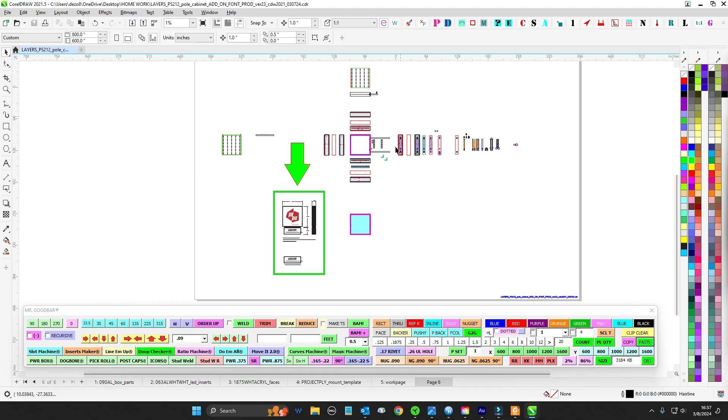Alright, got another one here. So this is for the PS212, whatever you want to call it.

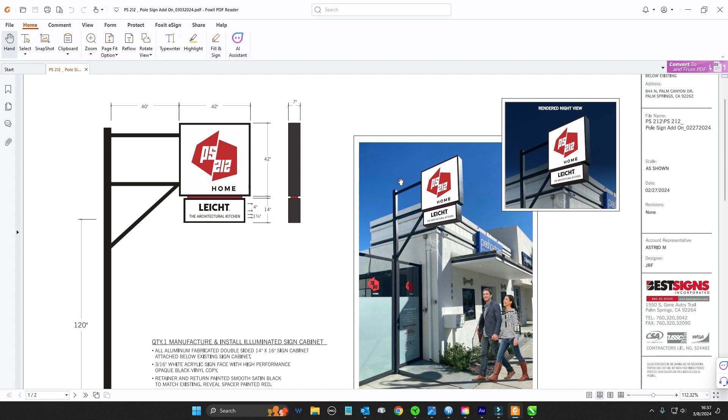In 2017, 2018 we went ahead and built this whole thing. And so now what they want to do is add this little box down here, give it a little buddy to hang out with, literally.

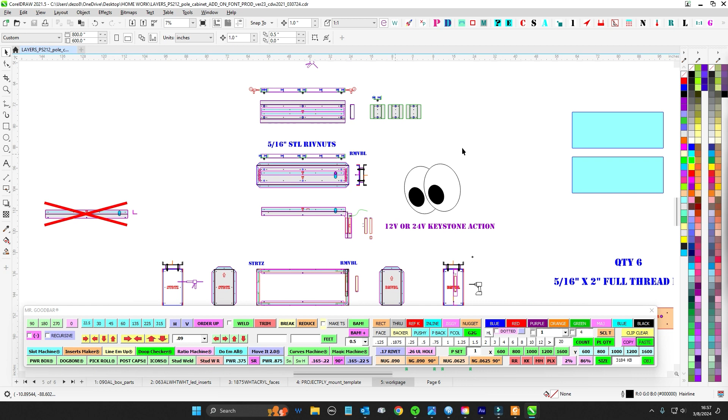So got some dirty dangles going. This is going to be one of those soft, chewy center with a hard candy shell type slider face, guys. So pretty straightforward for you cats. I just want to point out a few little things and kind of where my mind was and what order to do things, but otherwise I'm thinking slam dunk for you cats.

Also, it is noted on the work order that they do want this installed by the date. So this is kind of like as usual, everything's always due right now. But this does have a hard install.

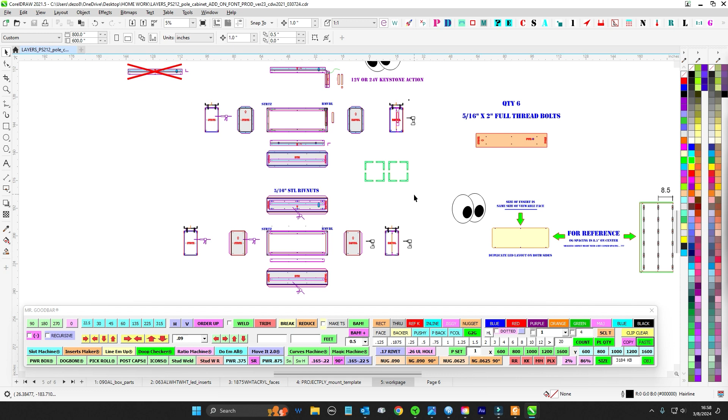So let's just get this through, because the center stage is on deck and I'm going to have to go full afterburner on that. So I figure we'll just push this through, get it out of the way, and then we can concentrate on that stuff. So with that being said, let's get after it.

So a little bit of the lay of the land. Here's all the 090 parts: hard candy shell, soft gooey center, and then the little top reveal part. You got some jigs to hold it together.

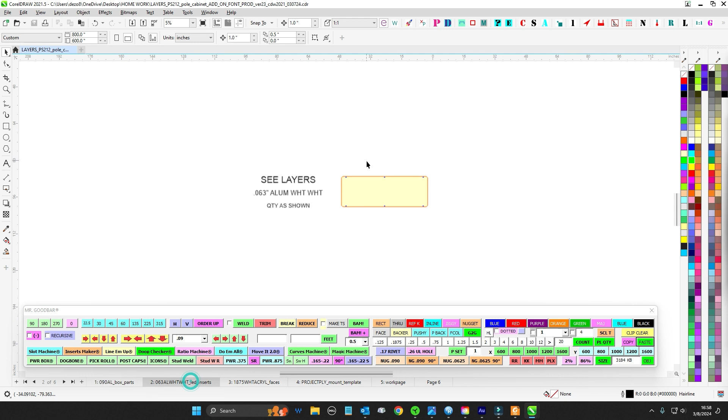You'll have a single 063 white, real simple. And then the two faces, get those two first shot. And then I got here for install, it's going to be either Project Ply, the Lauan, or like a 1/8 inch Sintra, or any kind of thing that's kind of a little bit stiff.

Or any kind of thing that's kind of a little bit stiff, and they'll just hold that up and drill their holes.

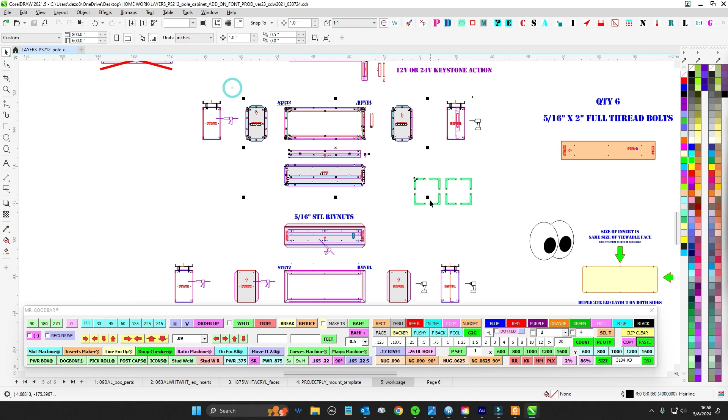So again, you start from the center out like we do, make your chewy center. We do have a bottom here that will clearance the UL holes, and it goes on one side there. And then you have your top, which has this little tray here, and that's going to be for electrical. I'll get on that in a second.

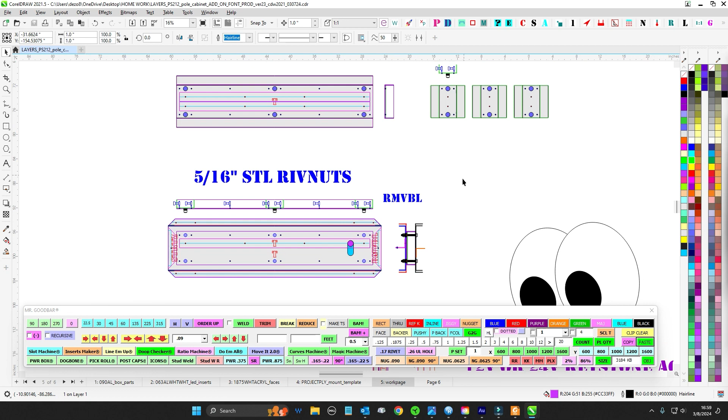And then you'll see where it goes on one side here. And then that has a little clearance for the power to come through from the top, from its buddy, the existing power.

The reveal is as simple as this. We've done this, it's a 1-2 bend. And then the two end guys will take care of sealing it up. But I pretty much have this set up to where you can just do rivets through the whole thing.

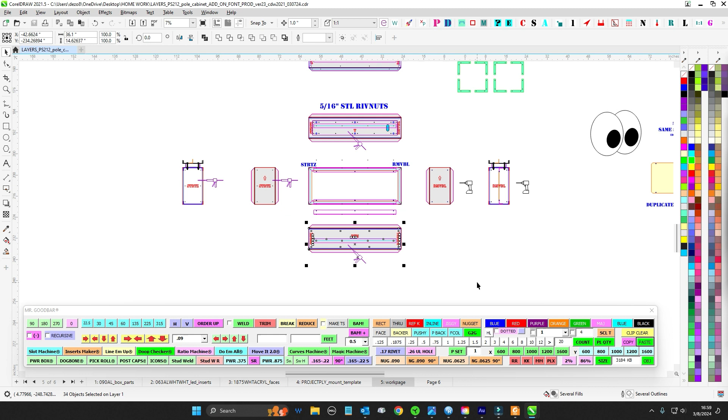So once you get this guy built, and then you do your hard candy shell, you weld the three sides. You'll have bottom, you'll have the street side, and then you'll have your removable panel side like we do, so you can slide faces out.

And just for reference, obviously street side, no screws, looking sexy. And then on this side, they'll be able to take that off and slide these out this way. So that's street and that's removable side.

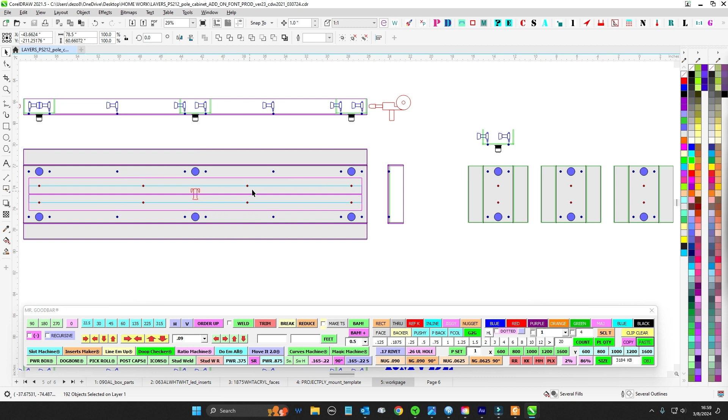So get this all welded up. And then once this is all one unit, then I'm thinking you can just go ahead and rivet through. You don't even really need to weld this or anything. Just keep it quick for you guys.

But maybe tack the ends closed, that way they can bond them up and it'll be all sealed up. But otherwise, trying to keep it real simple for you cats.

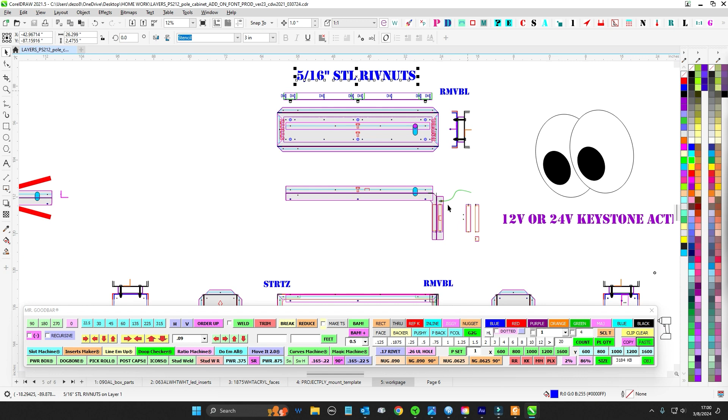And then we're going to do 5/16 steel riv nuts like everything else we do. But I did check grip range, and since you will be stacking 4 deep of 090 right here, the maximum is 0.31. So 0.36 is too much.

So what I did is I did clearance holes for the removable, so the riv nuts will go through that. And then you're just going to sandwich the two layers, the chewy and the hard candy.

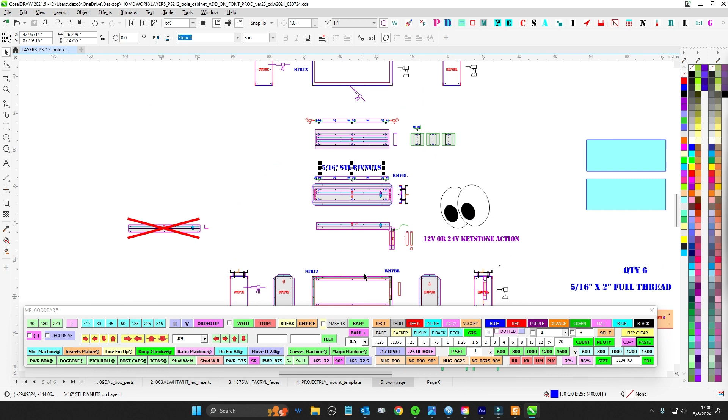And then I went ahead and brought in, because I don't know if we go as big as 2-inch full thread 5/16, I got a box of those coming, or a bag of those coming for you, just to make sure we got them. And I did get you some more of these.

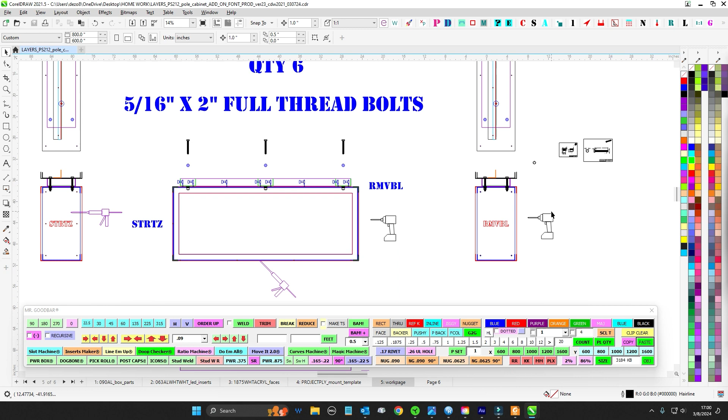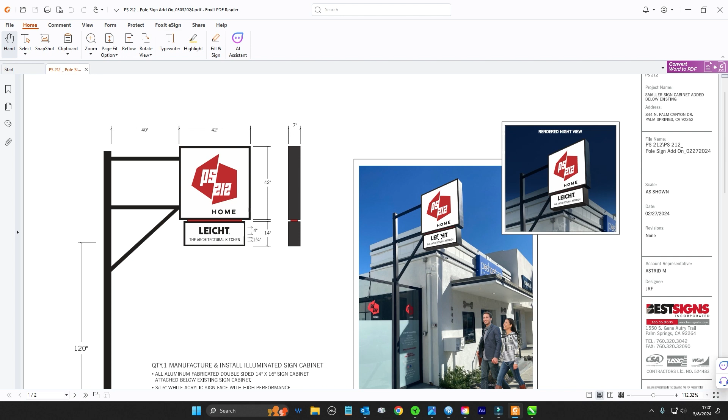For install, it's going to be as simple as taking this template - make sure install gets this, or if you're watching this, install it. This is the same size as the bottom of the cabinet, so you're just going to go over there and take that template, put it up at the bottom, make sure the street side is the street side, then just drill your 6 holes and burn through for your power.

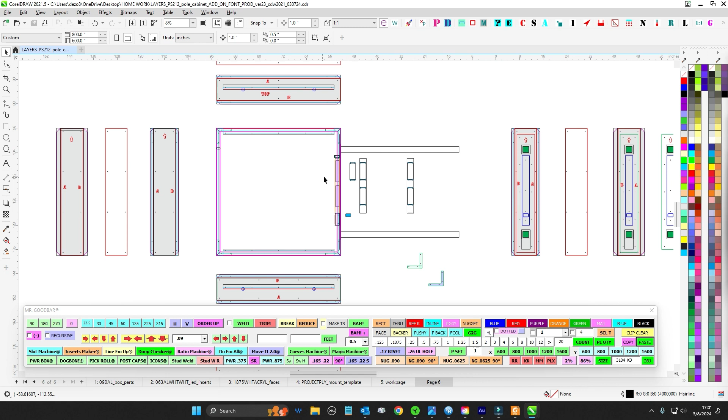That being said, what's going to happen is, since I know for a fact looking at this, I was doing this during my experimental phases when I was experimenting with things. These are MMPSs because we lost the files for all these - I don't have the actual pictures, but I know I was trying some hardware free setup. These are the MMPSs inside the fast packs, and we were using those by themselves, so I had it to where you could tuck the flanges in there. I'm not sure if we're using 2 MPSs for this array for 12 volt - I know they're pretty hungry, so I don't know if we were just doing one per side or whatever.

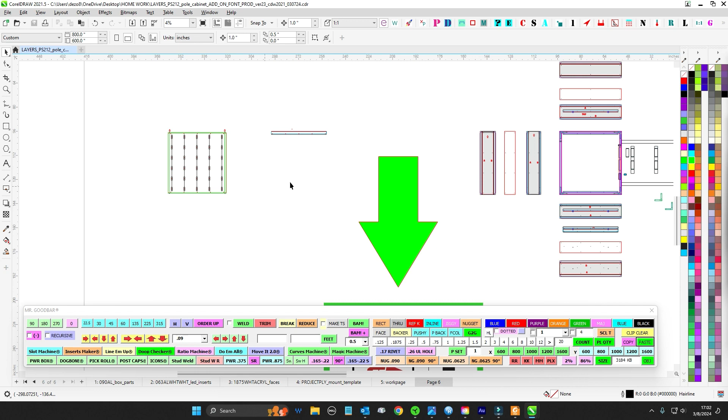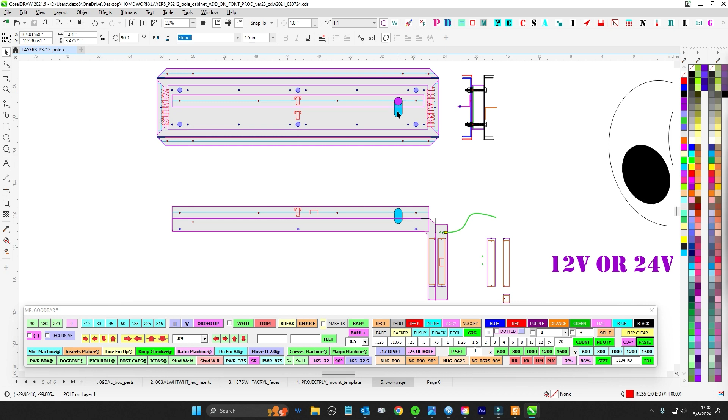Anyway, for install, I know the switch lives here, but if you can get 120 out, come down through the hole you're going to drill through the bottom here, then bring that through - you can see there's street side, so make sure you have street side and the pole side. Get that right, and then the power will be able to feed through this slot here, no problem, and you'll bring it down here.

For fab and install, you're going to take a 24 keystone, or it could be 12 - I don't know, if you guys found some 12s that'd be great, but if not we're going to do 24. As usual, something new, haven't quite done this yet. This will be like a 3-dimensional piece - you'll bend this, and that'll give us a little tray.

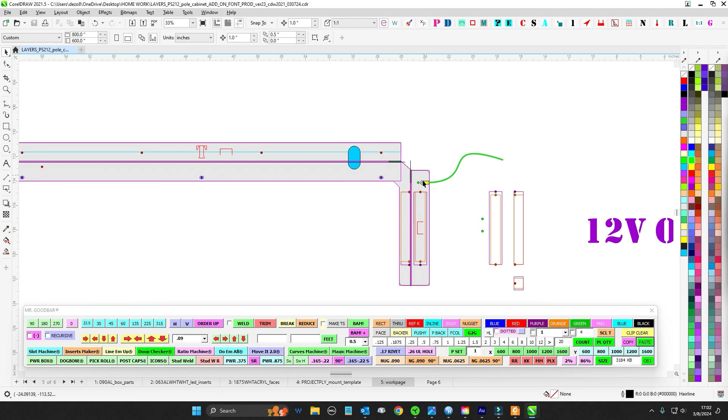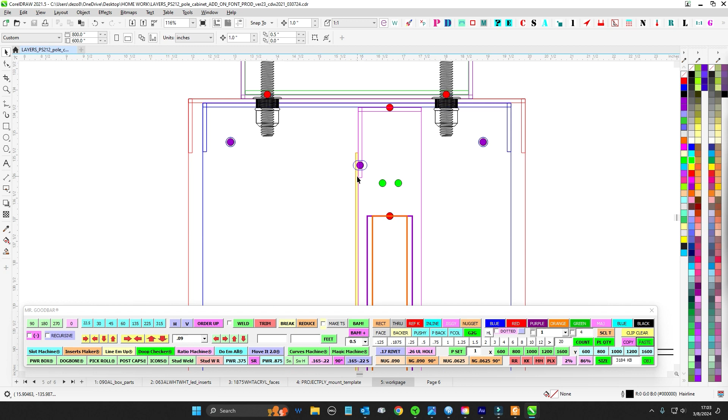You can put your ground right there, and that little tray is going to tuck right in there. You can see I have clearance for screws back here - it's only about 3/8 though, so you might need to use short screws or zing them a little bit, but either way that way they can be removable. This will be on one side of the white, and you can bring the white through - you can see here it's yellow, but I have the white here. The power supply is bent and it's going to be facing like that, and then you can come in with your white.

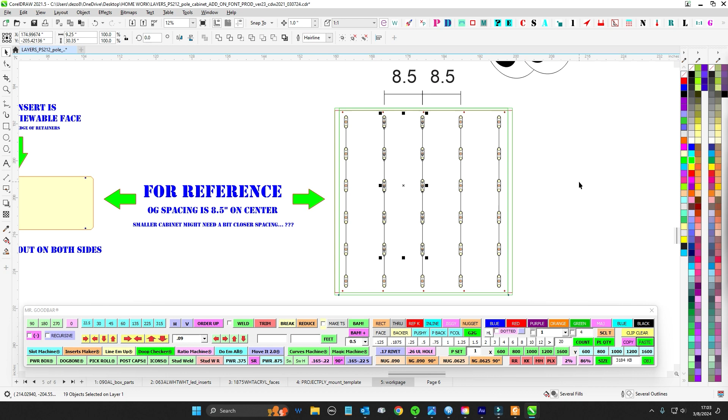Now that being said, let's talk about the LEDs. Again, I brought up that issue - we know for a fact these are 12 volt, and I think they're GE, but they've been out in the field forever, they're pretty tired, so who knows the dimness. Doing ours, I have 8.5 here, so probably maybe 6, but we don't want to pack this. My gut instinct, I'd put 3 rows just to melt the plex off nice and bright, but that's going to be crazy bright compared to this.

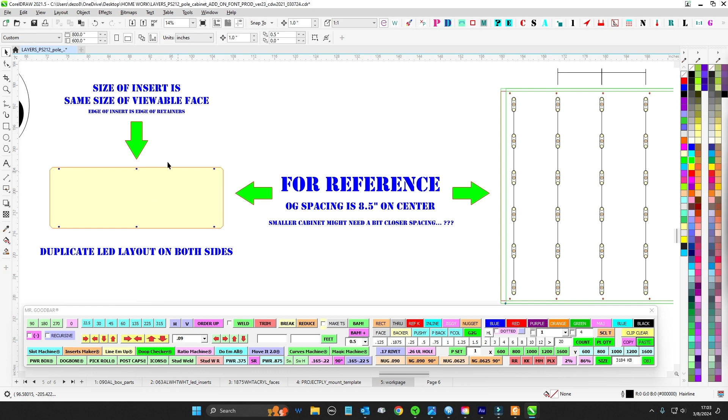So maybe just 2 strips, 8.5 - a little too wide apart for this little guy, so maybe 6 or something, I don't know. This is the actual size of the opening, so you can work from the edge of this over, and this will be what we see. So just work with that.